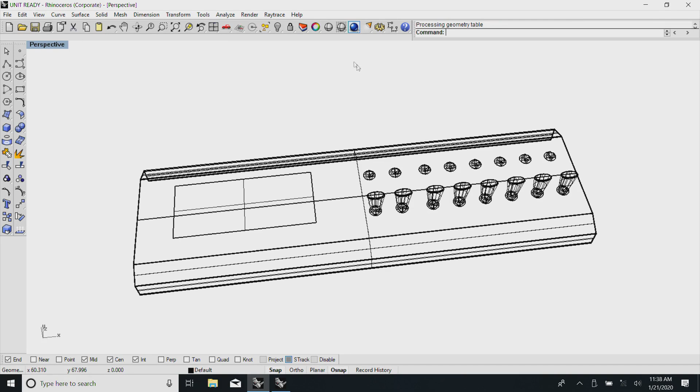I am continuing on the theme of how to make solid models which are useful for laying out equipment. I have covered a little bit about how to make a small electromechanical item. Typically the simplest thing you can think of is probably the switch. So, if you come to this, you remember this, and then I also told you, if I now make a proper switch, I can make it generic by giving it different colors and so on, and then I can reposition it at various places.

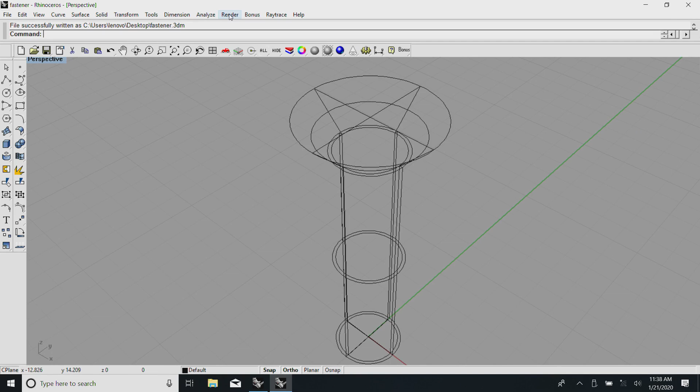Now, imagine this requires an enclosure at the back. At this point we definitely require fasteners to put it together. So, I have made a generic fastener, and in the previous lecture, if you remember, I had covered a little about the types of screw heads and various other types of fasteners. I will now just talk about one single item: how do I attach two simple sheets and make several types of openings in them.

The basic sheets are two sheets put one on top of the other, and in the case of our enclosures, usually there will be a small lip at the bottom and something overlapping here, and we have fasteners which are fixed there. And with these fasteners, if you couple them with the drilling detail, a few other issues are involved. And why do we need to learn this? Because these are the ones that will create surprises, and as a designer, if you are familiar with why this is done, it is very easy for you.

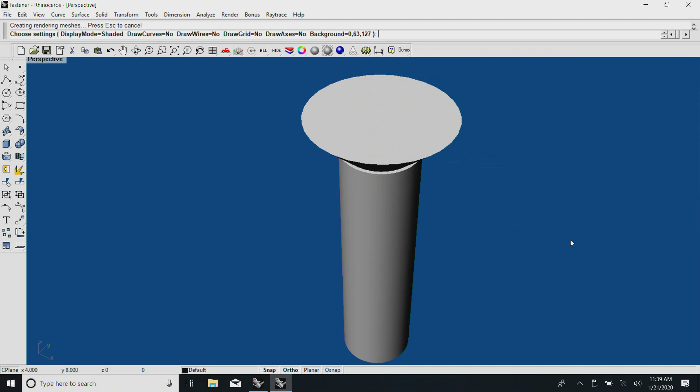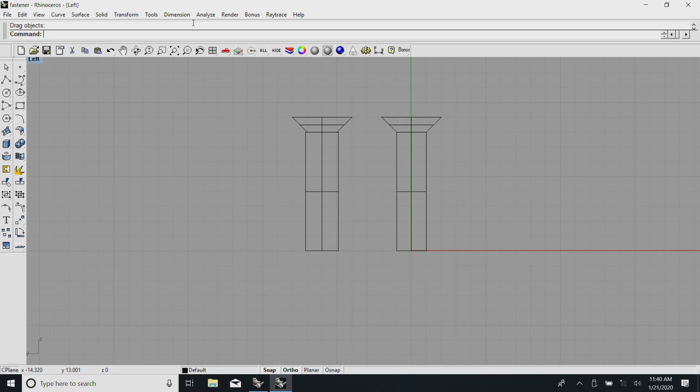So, let me start with one such thing here. Please look at this here. This is, as I said, a very generic fastener. Now, I will hide this. You see here, I have distinctly two objects which I have created. You see two of them here. Both of them represent two things.

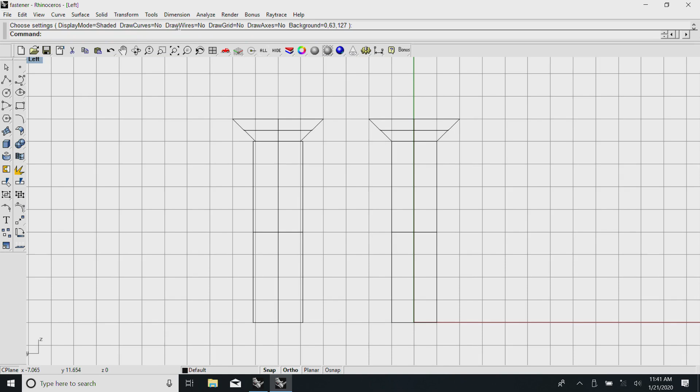The right side one is an actual fastener, meaning there is a small cylindrical part which passes through something, and on the top there is the head portion. In the previous lecture I covered that there are a very large number of heads which can be used. So, intentionally this was made in a generic way. I can remove this head and put something else.

So, first, by looking at the catalog, I need to create a cylinder of the specified diameter, and I need to create something as per the norms that were given. In the case of metric, usually if this is the diameter, this will also be nominally about the same diameter. In this case, this is slightly different. And the most important thing is, in the case of this tapered or countersunk head, the angle is very important.

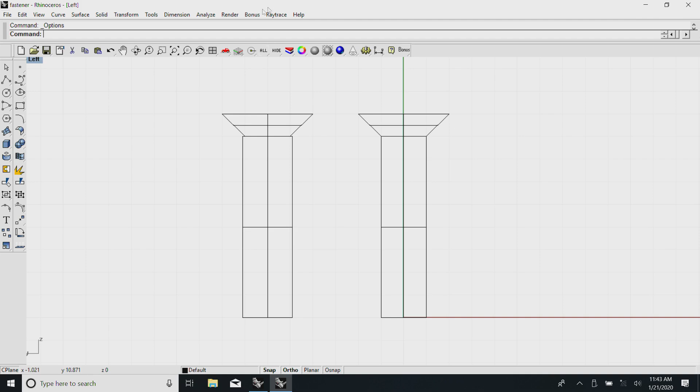One of the important things is that most drill bits are not 90 degrees, depending on the way the machining operations are done. They vary between 110 to 115 degrees, depending on the basic material and so on. So, once you specify that this has to be 90 degrees, the process planner will know that all the countersinks have to be made properly.

One more thing I have told you about: the problem with a countersunk fastener is that it locates itself almost absolutely. So, having two countersunk fasteners and two fixed nuts, usually no adjustment is possible, and even a small variation, typically in sheet metal of the order of 0.2 to 0.3 mm, is likely to create a serious issue. So, in all those cases wherever permissible, they will not use a countersunk fastener.

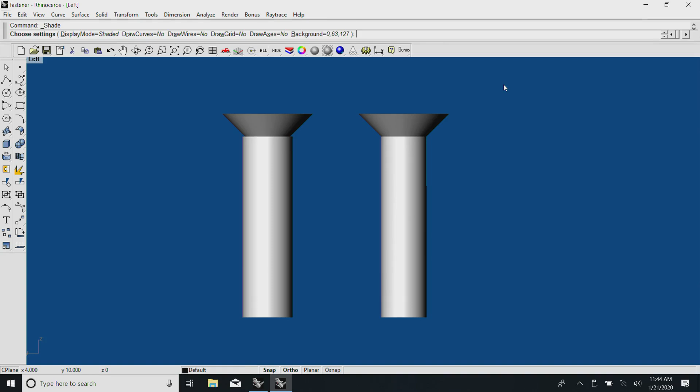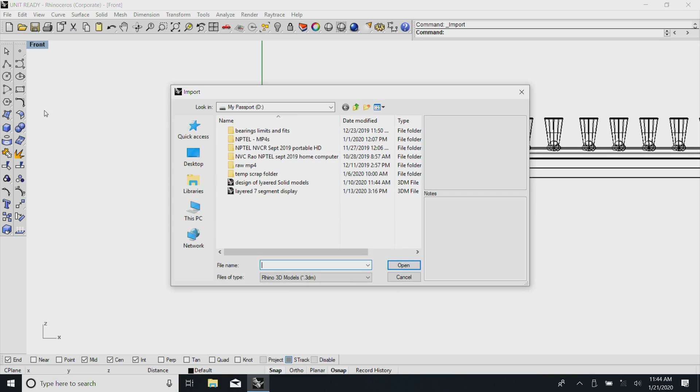However, if you want to use a countersunk fastener, I will show you how it is done in another session. Now, let me get back. I will now save this, yes, and now go back to this. You see here. Now, if I want to, let us say, fix it somewhere, all I need to do is import that piece; there is an import provision here, and see where it is sitting.

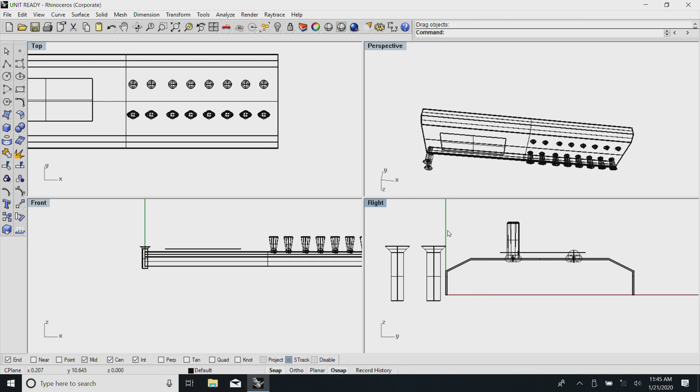At this point I can now do various operations like move both of them out here and orient them properly. See here, I have created something which is at one level quite useful. Let us say it needs to be fixed to another chassis.

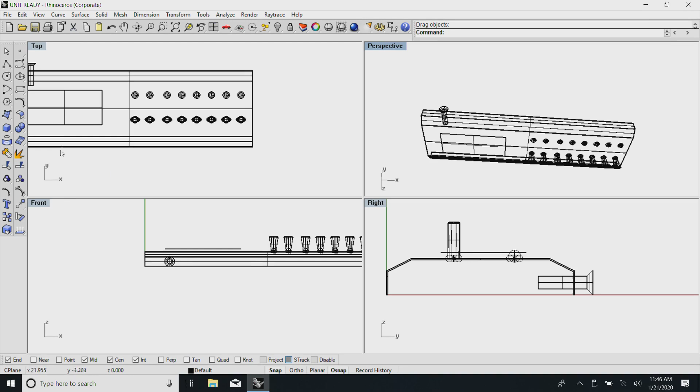Now comes the interesting point in this. I will just make it a little faster. It is customary to have the minimum amount of fasteners. So, I keep one here, keep one here. Now comes the small, I will say, trick or whatever it is.

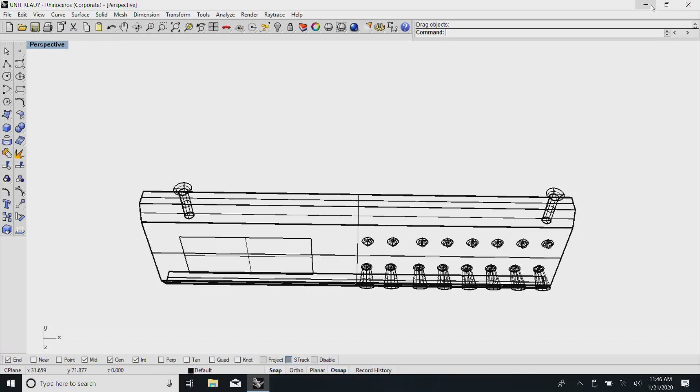You will notice that I have two perfect solids, and if you examine the solid again, I will just open it on the other side. I go here and open this separately. One of the things you will notice is there are two portions in this. This one is a little bigger than the other one. The outside cylinder represents the hole that we need to drill.

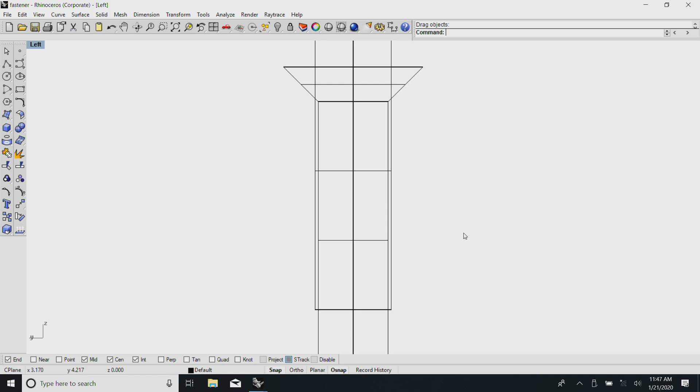So, while making this fastener, just to show you, I have made something bigger, but we need to make a particular thing depending on the size of hole I have told you. In the case two items have to be located, it is customary for us to make one of the fixing holes a little small.

So, in the case of M3, customarily 3.2 mm is used, the other is made a little bigger, customarily 3.5 is used. So, in one corner if it fits, making all the dimensions from there will be convenient and usually it fits well. Now, in the case of our manufacturing, can we have so many types of openings that are required?

That is where it is a question of your practice. Me being trained under an old Deutsch or German system, I am all for being perfect. I am all for making 3.2 holes in every corner and having 3.5 mm holes elsewhere. But of late it has been very common that they will probably make all 3.5 millimeter holes, and something else somewhere else will locate all these things firmly.

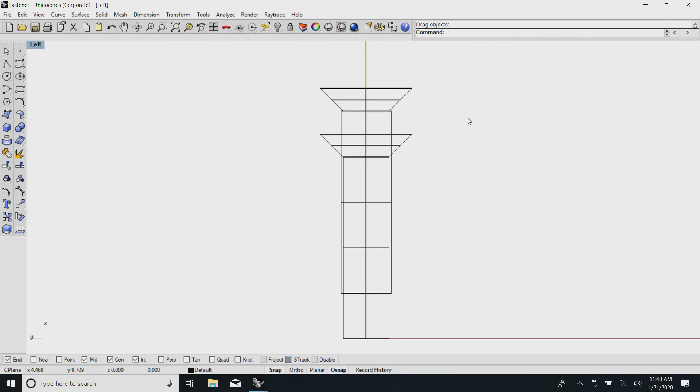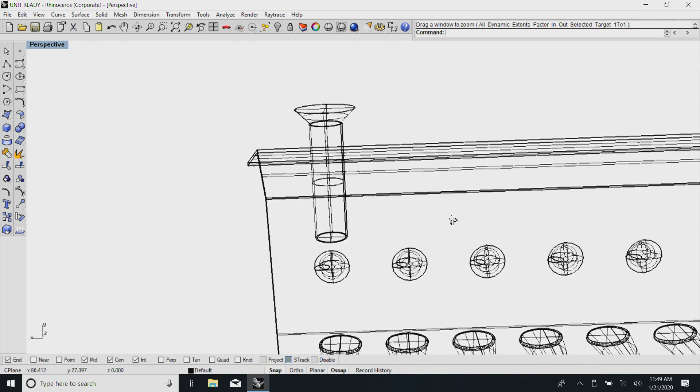So, I will just show you this: this outer one represents the hole and this one represents the actual fastener. So, at this point I will close this drawing and open this back. Right now, if I rotate it on the other side, first thing you will notice is it is just a sheet.

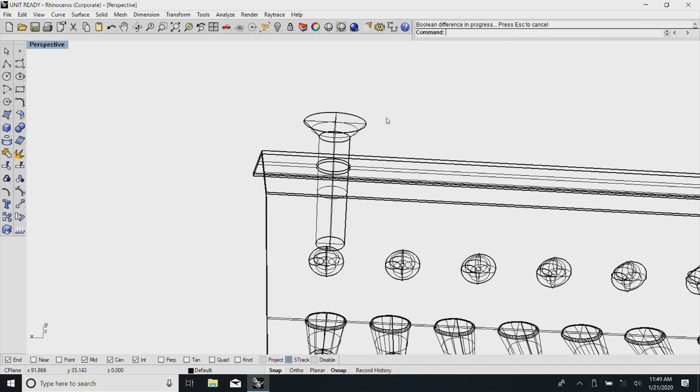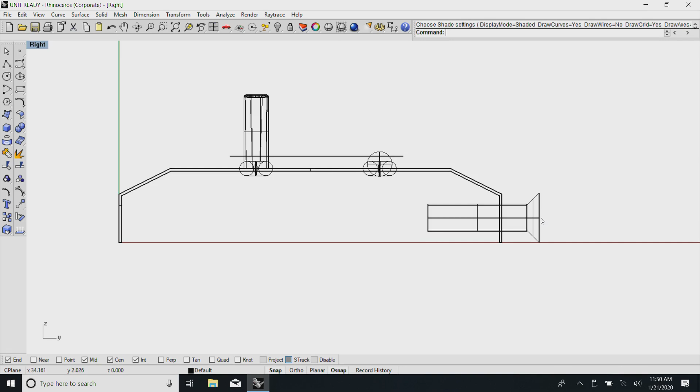Now, let us say I had made a nice unit including a bottom cover and all that, this fastener I can just introduce it, do the Boolean operation, and I have the nice set ready. Just to make it a little more interesting, I will now see if I can create the... I have a line which I expect sits here. Can you see?

Now comes the other thing, once again we get back to those fits: when two covers need to fit, how well will they fit? In that case it is a very loose assembly fit, meaning there must be a gap, typically at least in excess of 0.5 millimeter allowance is required. This 0.5 millimeter allowance takes care of all the small inaccuracies that are likely to spring up in manufacture. So, I have here the old...

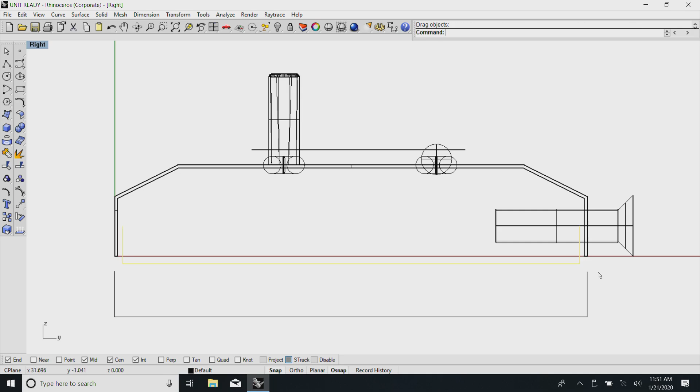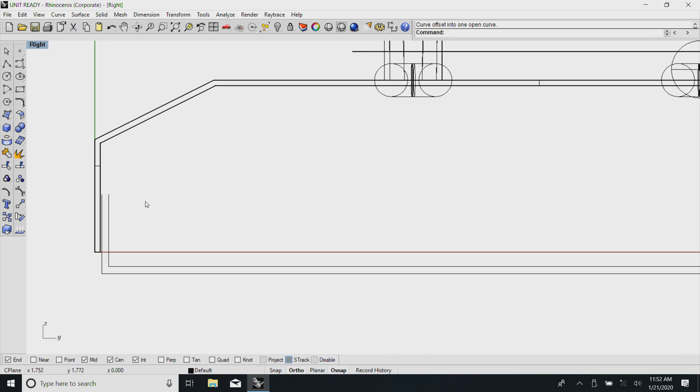I tried just to make things easy for you to understand. You have seen this, I will delete this. Now, I have this construction line which you see here, I have a chassis which is strong, and I have all the necessary things defined.

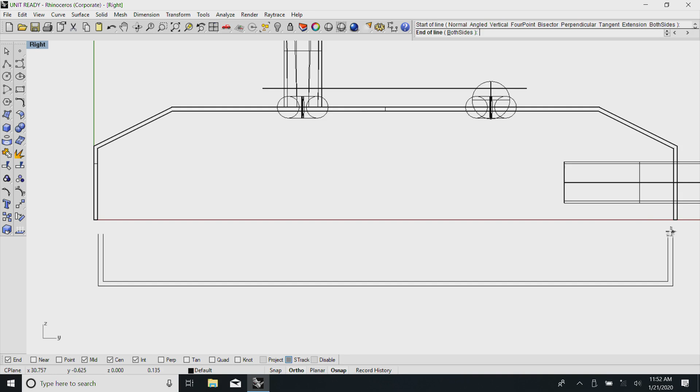You see this? This has been worked back from the front panel, which we started with, saying typically this type of dimensions we require. And this could be the chassis which I am talking about. So, what I do is I weld all these things together and see where it is sitting actually.

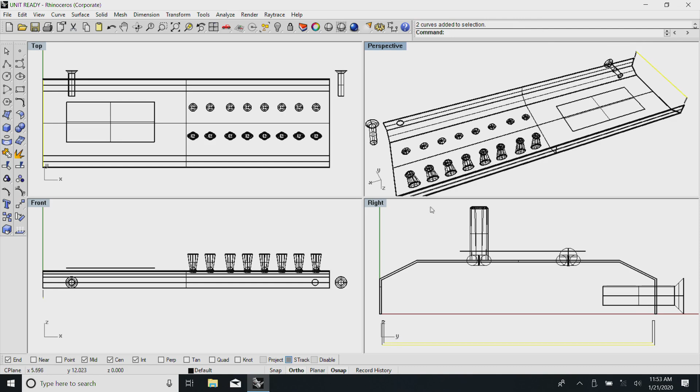See, this thing is here. Now, I try to extend it to cover, make a solid out of it. Now, you will notice in this drawing, I have this nice inside cover also ready. You have seen this? I have the inside cover ready in this.

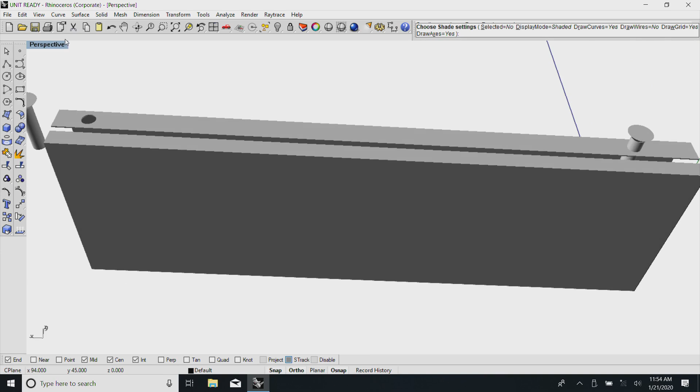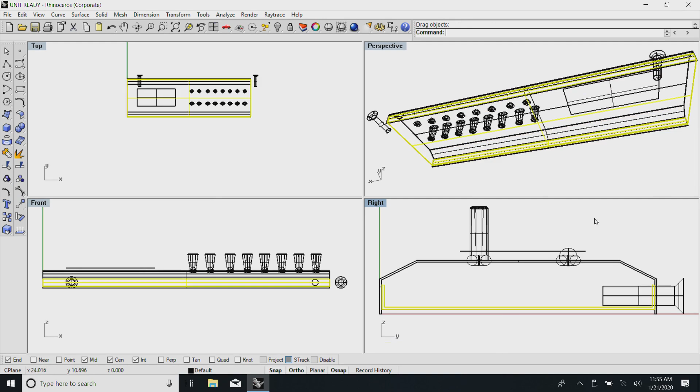So, to continue with my earlier assertion, if I carefully look at this drawing, this has been created using several surfaces. All I need to do is, because of some technicality which I will try to explain to you later, all these surfaces need to be grouped together, moved inside, and one more time we try to operate this Boolean which I was explaining to you earlier.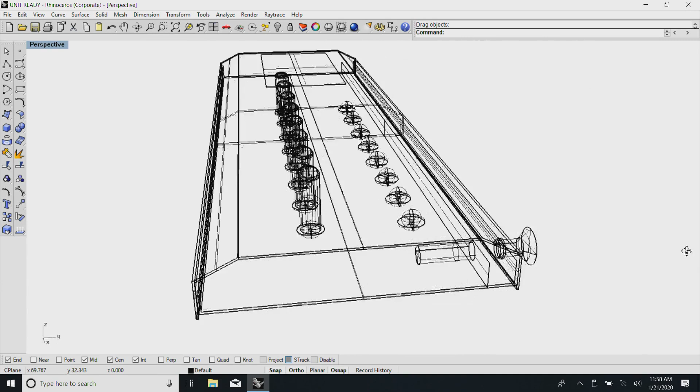Can you see here? Now, I will try to do the same operation which I have done earlier, except inside. You see, this is the outside one which I am interested in. Inside one can be hidden actually. Now, I try to do the same, all the necessary details which were kept below can

be seen here. I have the inside one, we have an opening here, and a little by mistake, a little by intention, I have not converted the earlier portion to a solid. It can be a thicker bar. Why do we need a thicker bar? Coming back to the old system, you may not have access at the back for holding the nut.

So, for the purpose of holding the nut there, we can have instead a long strip which has taps on both sides. In fact, long tapped strips are available which are part of the 19-inch rack system. So, if you can get these long strips, which typically have a minimum of 2 or 3 taps on one side and another 2 or 3 taps on the other side, we can insert one of these at the back and fix the screws.

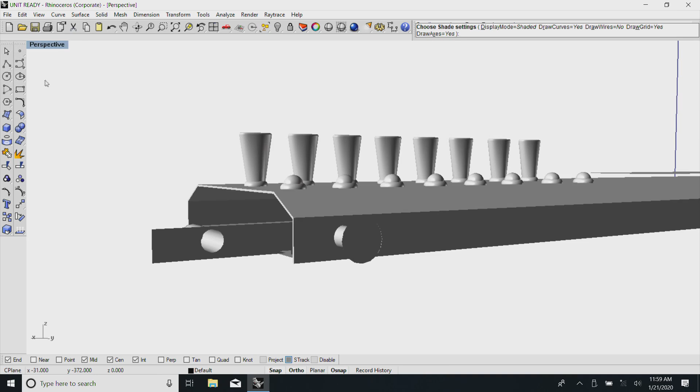Why this business of fixing the screw, I will once again come back here. For the moment I will just hide all these inside ones, or best delete them. See here, now comes the important point: can I make a countersunk? Here we have the advantage, why I had made that strip.

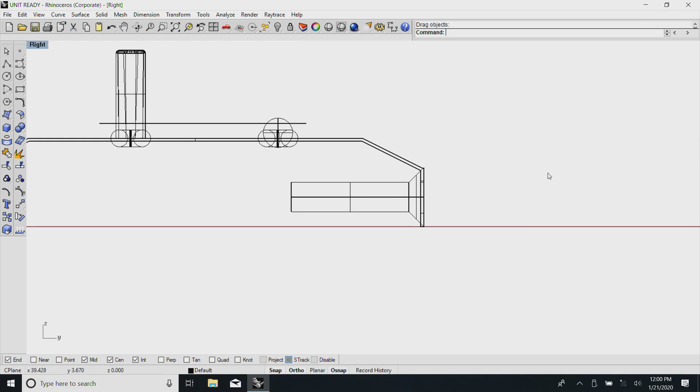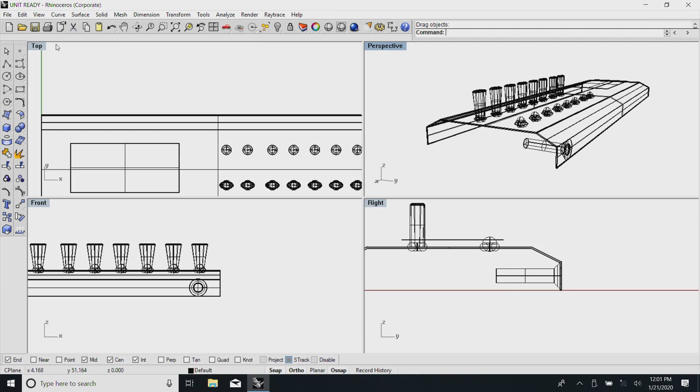In case the sheet is very thin and you still need a countersunk, most likely you need a small build up at the bottom and have this countersunk on the top. So, I will take it here and see if I can do some method of having a hidden fastener. Easiest, as I have explained to you earlier, it is all very easy for me to make

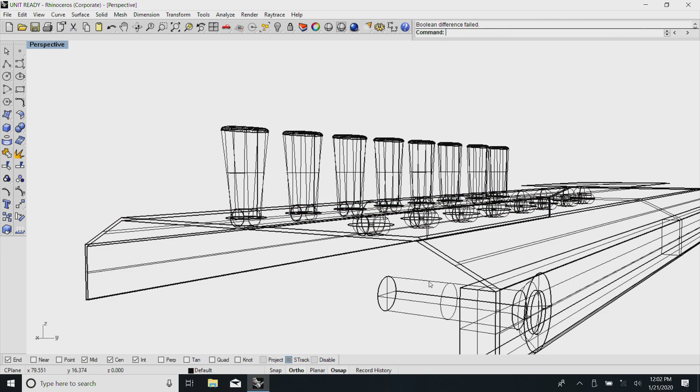see here, at the back of it I attached a small strip, and this strip can be part of the chassis which I have told you about. And why all this circus, this very complicated construction, is to make sure that in the end we have a nice piece like this which has all the countersunk which I am talking to you about.

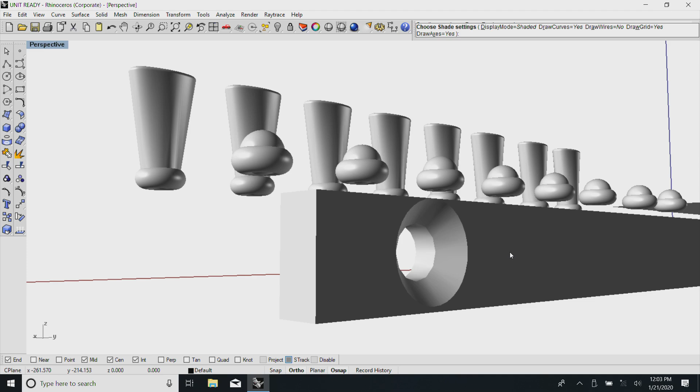You have seen this now, the bottom piece has the countersunk, so the top portion of the sheet also has the countersunk and it goes inside. Now, let us say this piece and the other thin sheet are somehow attached together. Simplest way is, that is where I said we can have these things which have tapped holes. So, we can make a long strip nut which is long and narrow like this.

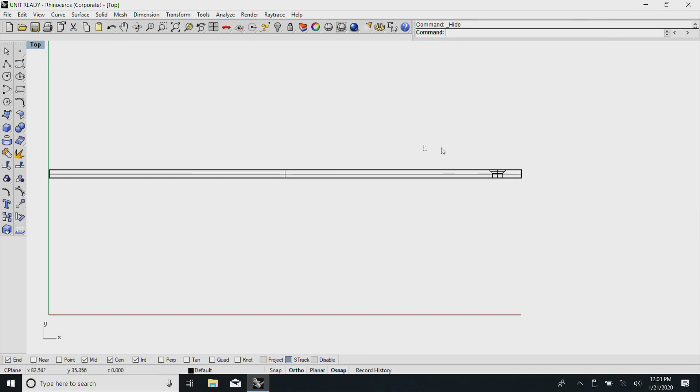So, for the while I will just use this piece, hide all other items and see whether we can create a strip nut with this. You have seen, this is a long strip.

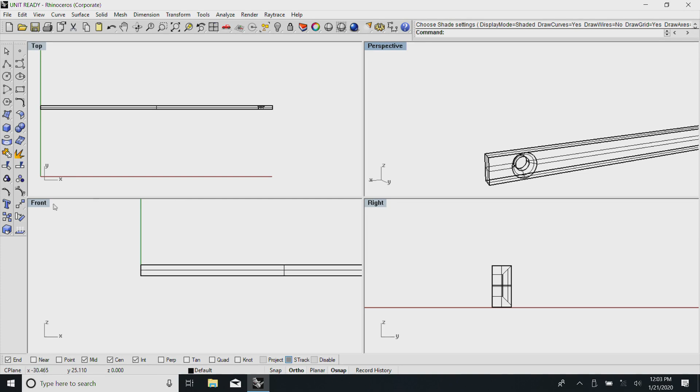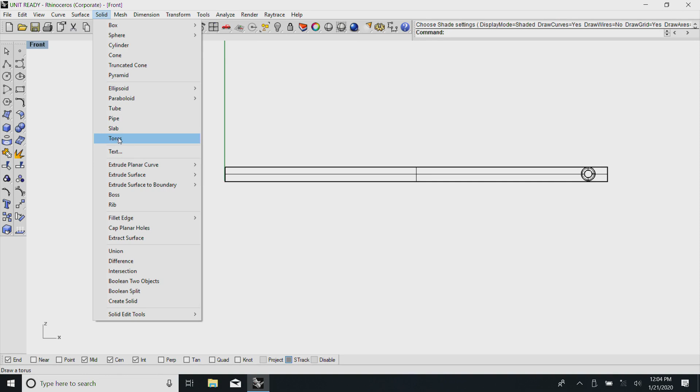Now, if we can create a spiral, or a hose-like thing, which has the necessary amount of various details, it is a relatively simple job for us to create a thing like this. I will just see here if I can create a thing like various types of spring-like objects, various types of torus-like objects, various types of pipes.

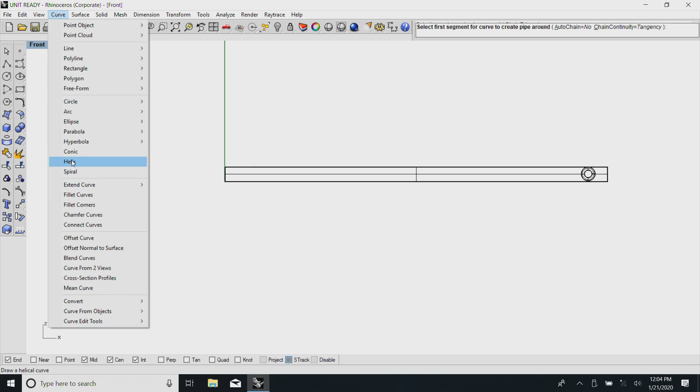We can make a spiral-like thing and subtract it from this. Once we make the spiral like this and subtract it from this, it is very easy for us to create. So, we have things like this: we can make rails, we can make things like a helix, then we can make a helix.

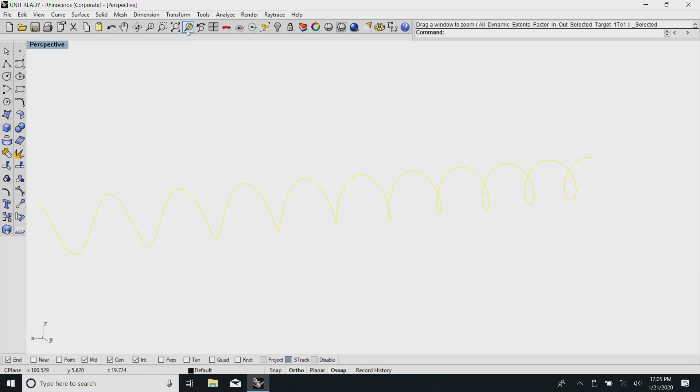See what we have here. So, in another view, it is an object which looks a little like a spring. It is actually a spring-like object. All I need to do is make an appropriate thread form, and in general what we have is simple triangular forms.

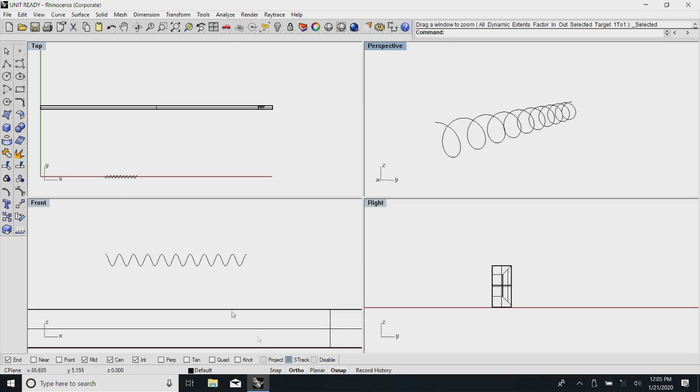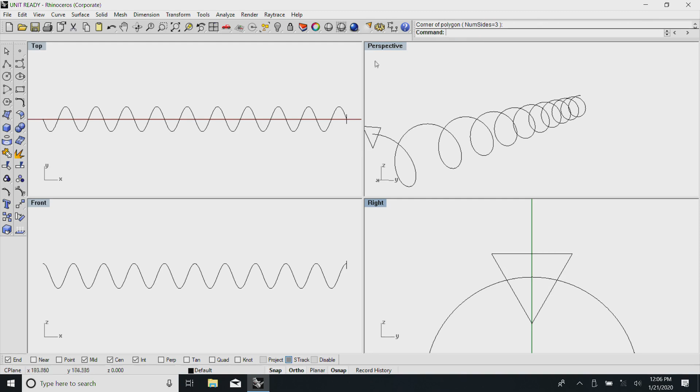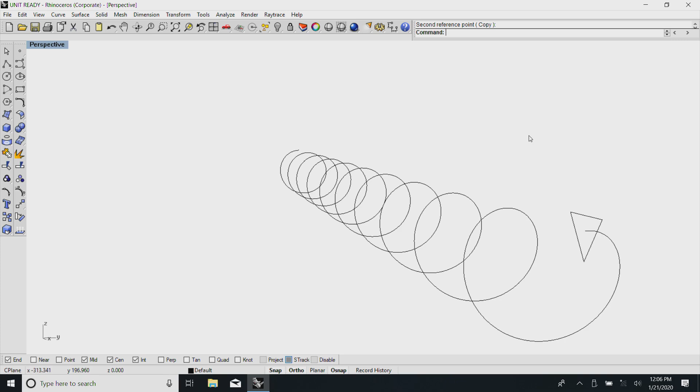In this, all I need to do is somewhere here I create a small number of sides; generally all triangles, we know. You have seen? I have managed to create a triangular thing, except a small indiscretion of mine. I need to rotate it. It looks nice. Now, I try to extrude the surface along a curve.

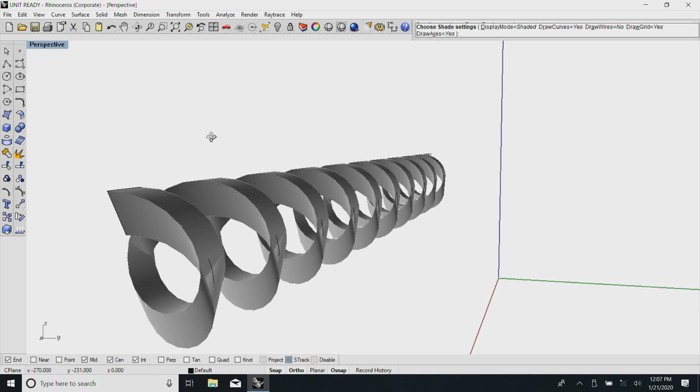See, I have a reasonable looking thing which looks a little like a screw. If I properly orientate it, in this case the inside forms all right, and then if I play around with the pitch and all that, this can be used for showing a screw thread, but as you see it is getting very complicated. So, at least once if you spend the time, find out which is the thread profile and on what the screw moves around, it is very much possible for you to create several items together at one point.

Part of the fastener is the actual cylindrical portion, and part of the cylindrical portion is the clearance hole. Again, two types of holes are possible, and an important thing is the diameter, and then if you go back to the metric standard, the length of the threaded portion, the unthreaded portion, and the formation of the head on top of it. Also attached to that is this thread form. So, once you create the proper thread form, the proper pitch and all that, all the pitch details are available in the corresponding IEC manual. So, quickly I thought I will show you this.

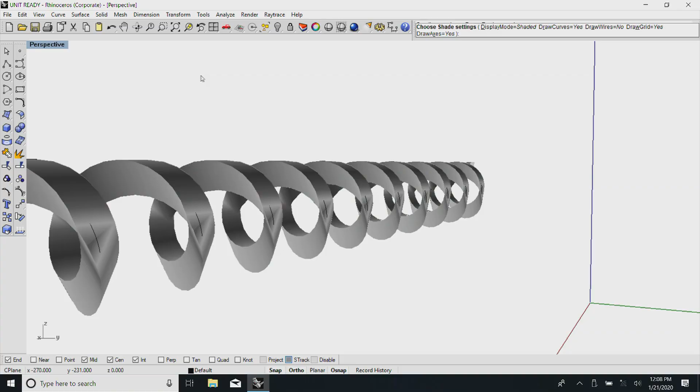Now, you see that it is possible that the thread pitch and these things have to be adjusted carefully, the triangle you make. Sometimes things like a helicoil use a very different thing. Please look at the other monitor. I will give you a thing called a helicoil here.

For soft materials, we end up with these thread inserts. One of the things you notice about this thread insert is it comes with its own threading system, its own full kit. The magic is in soft materials: suppose you want to do something in aluminum, you can't afford to cut a fine thread in aluminum. So, this particular form has a diamond shape.

The outside diamond goes and sits in the opening that you tap using an oversized tap, and once you push it inside, the inside forms very hard threads, and the inside will strictly follow the thread norms which are specified either in metric or, in the case of the US, the Unified National coarse, fine and extra fine. Of course we have so many others, including Japanese, GOST from Russia, and the ever present British standards. We have the BSW and the British BA threads and all that.

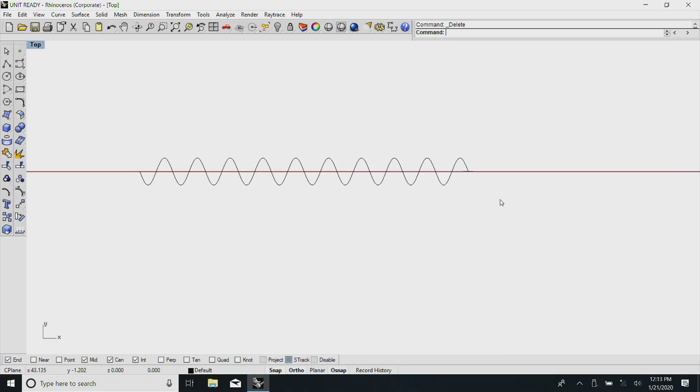Now, one last time before I go back to the internet. So, if I had to see any of these things, for example, aluminum standard enclosures, various details are available here, and very quickly you can order, get these things as you want. You see here, this is one of the things which commonly people use. These are typically the plastic, thermoplastic enclosures, and any enclosure you want is available. So, I will stop here.

I suggest you on your own try to locate all these various details I am talking about. One is various types of electrical items which are useful in your field. If you are into a conventional type of electronics where you have things like switches and displays, we are very familiar. The most tricky part of it is usually the rear panel where all the connectors are there.

And of late we are very familiar with seeing very simple things like the USB A and the USB mini and USB micro. Then C also has come. We are very familiar about those things. That part of it is the opening that is visible, but inside there is a huge shell and immediate hardware. And in the case of our electronic and audio, you have several other things including the ubiquitous 3.5 mm jack and all the way to XLR connectors.